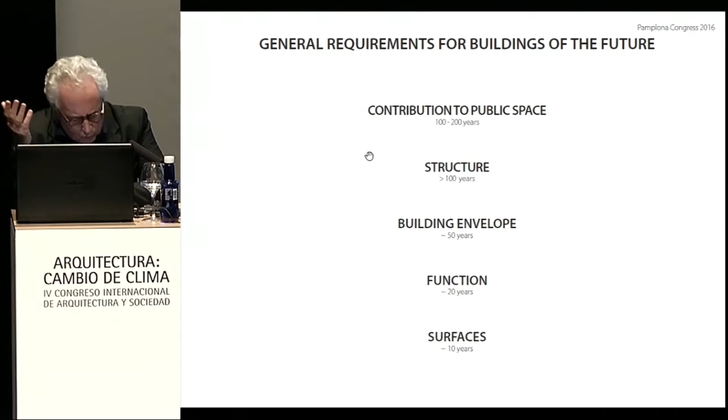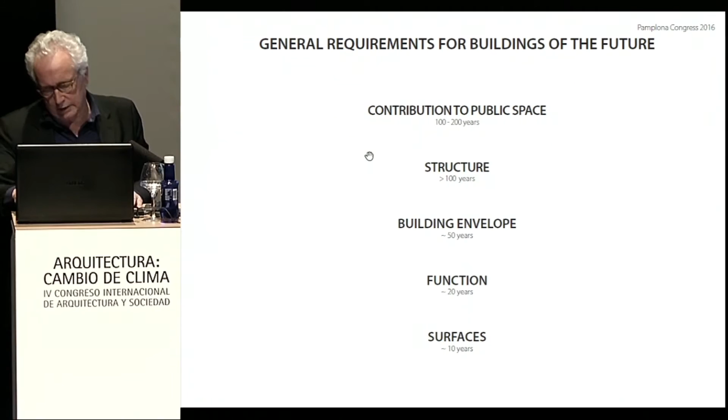You all remember this very nice book by Giedion about time, space, and architecture. We were talking a lot about space during the last 50 years in architecture, but we did not really talk too much about time. But when we deal with this question of time, we have to understand that a building nowadays is an overlapping of 5 very different technical systems. And these technical systems, in a long-term view, have very different lifespans. That's a little bit a contribution to this resource efficiency, which I will explain afterwards.

So the first question - which will last longest, which is the most important decision about architecture in the 21st century - is very simple: it's the question of the contribution to the public. So the key question for architecture in the 20th century was a little bit, how good does the building work? How good is the use of the building? How good is the function of the building? At the end of the 20th century we learned to understand that the feeling in the building is very good.

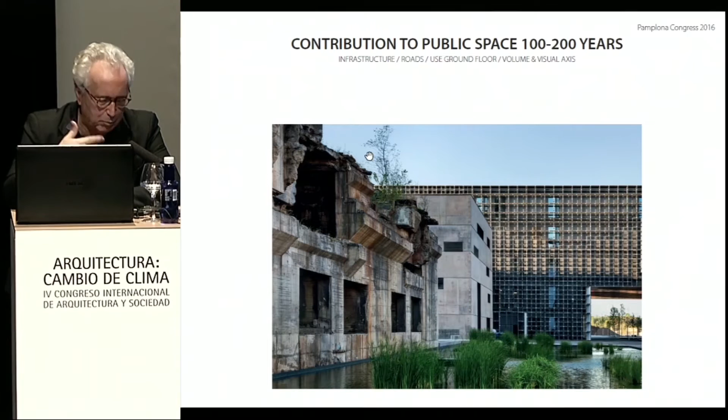But in the future we will have to learn what is the contribution of the building to the public. So I always say it like this: the most important user in the 20th century was the person who moved into the building. But the most important user of the building in the 21st century will only be the person who passes by. Because in the feeling, in the emotion, and in the values of that person who passes by, there is the future of the building. Because we don't need a first user, we need a second user, we need a third user, and this is a question of the value of the building, how it is accepted in practice.

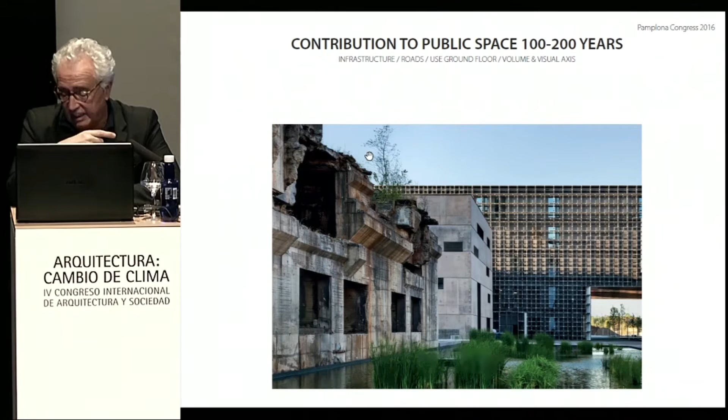Now I tell you something about Switzerland. You know, Switzerland is the only country in the world whose constitution states that sustainable development is a goal. But when Swiss people speak about sustainability, it's something very easy: how can we keep up the values of our society in economic, ecological, and social terms? So everything is related to a question of the time frame.

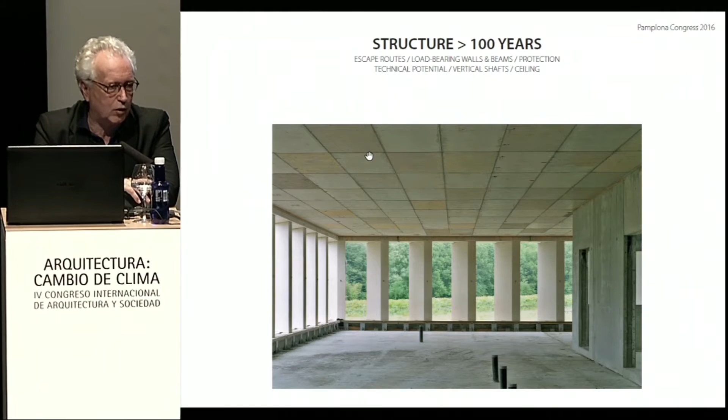And therefore there is a law in Switzerland: when you design the structure of a building as an engineer, you have to guarantee it for 100 years. And if there is damage in the building before that, the structure - understood as the load-bearing quality of the building and its vertical organization - is at fault. And if there is a mistake, don't be the son of a Swiss engineer. It's dangerous.

Don't be the son of a Swiss engineer, you know. But it's by law for more than 100 years, and I think it's very reasonable. When you understand that this part of the building should last for more than 100 years, you can imagine that they think the value of the building should generate benefits to society in a much longer term. And that's the relation of the 200 to 100.

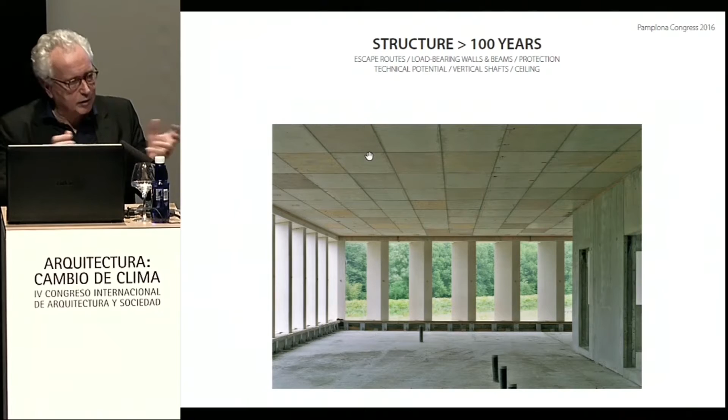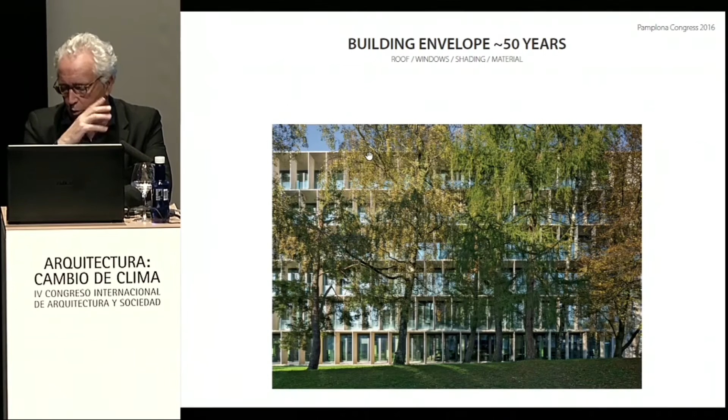The next one is also very simple. When we do research, we always find out that one of the most expensive parts of the building is the envelope, according to economic terms. And the envelope becomes more and more expensive in a building, even in future. So the average lifetime at the moment in the existing building stock is about 50 years. Then the function, the program, the use of the building is only on average 20 years. And the more specific the function is, the shorter the lifetime.

Maybe you know all hospitals. Hospitals are buildings where the building cost is the running cost, because you change these buildings and you have to adapt them anyway. So be very careful when you do very high specific buildings.

And the next one is the surface, you know, the surface including all the technologies, all the heating, cooling, ventilation systems. At this moment, everybody tells me we save the world and we save the climate by doing investments which have a lifetime of 10 years. I'm sorry, the 10 years I didn't invent, that's how these industries are living on, you know.

So I don't believe that we really can adapt to climate change or tackle greenhouse emissions by using a lot of technology, heating, cooling, mechanical ventilation, and these systems, which on average have a lifetime of less than 10 years. Very strange, I don't know why we believe this. I'm sorry, I don't believe this.

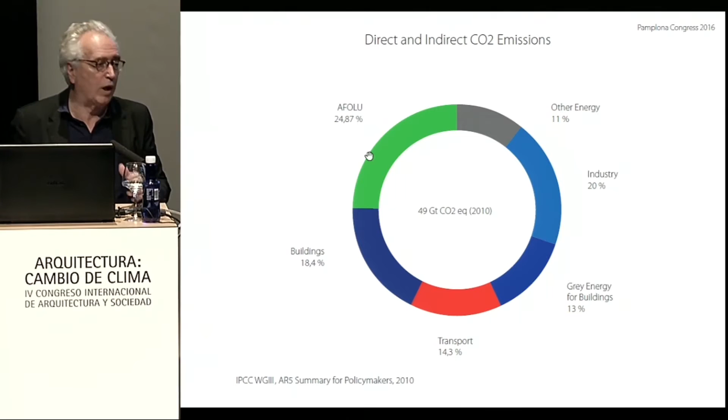Agriculture is 24.87%. Industry overall is 20%, and 13% is about what we call in future the gray energy. The gray energy is all the energy used to produce all the materials we need in the buildings. Otherwise, you see the transport at the moment is very low, only 14.3.

So electrical cars are nice, but they will not change the greenhouse gas emissions. I'm really sorry, it's very low. But when you calculate together, 18.4 plus 13, that's the global number, about 32% at the moment is only related to the questions of doing and maintaining buildings.

This number is a global number. It's a summary from the Intergovernmental Panel on Climate Change, which is a United Nations organization. These are the numbers from 2010. They adapt them every 2 years when they have their conferences. It's not that different, so I still have it there.

So architecture is the biggest contribution to greenhouse pollution overall. I'm really sorry. And how different this can be in different countries - I give you a number for Hong Kong. 91% of all the greenhouse pollution of Hong Kong is only related to buildings and maintaining buildings.

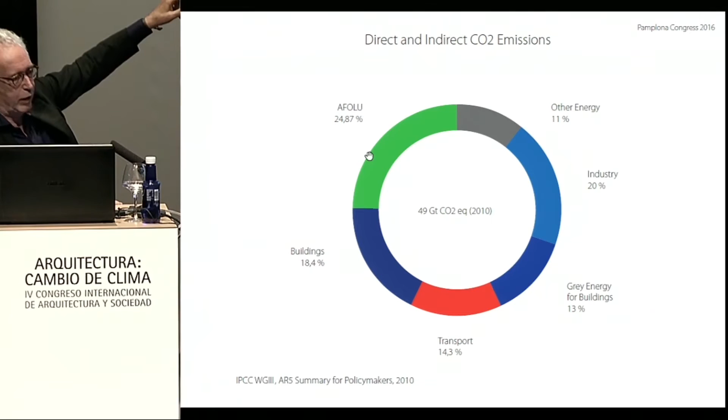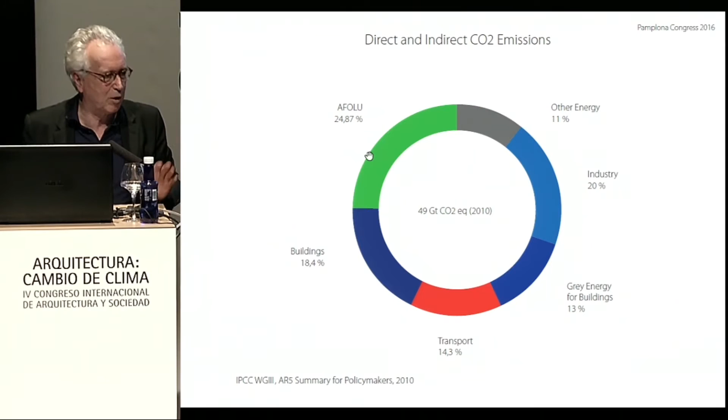So I know you were talking yesterday about the cows, the green things up there. It's also nice, but when this would happen in Switzerland, I would say it's a Swiss behavior, because normally when in Switzerland you tell somebody you failed, he always tells you, yes, but the other one also failed. But this is a funny story, I don't like it that much. It doesn't mean anything, so I'm sorry about this.

We have this phenomenon at the moment all over the world, that incomes and real estate costs develop very differently. When this goes on, you will see a lot of social tensions, social questions, and social fighting. It's funny that this is a parallel development which I can see in nearly every country.

So when we were talking about these issues, I'm mainly talking about two questions. The first is how to make buildings more efficient in maintenance and investment cost for the user. The second is how to increase comfort, or at least keep the same level of comfort, while reducing impact on greenhouse gases and carbon dioxide.

We've been working on this for more or less, look, when I was young, the first political thing I remember was the oil shock of 1973. I was a student then, and the highways were empty. I thought, this cannot be the future of our societies, depending on these things.

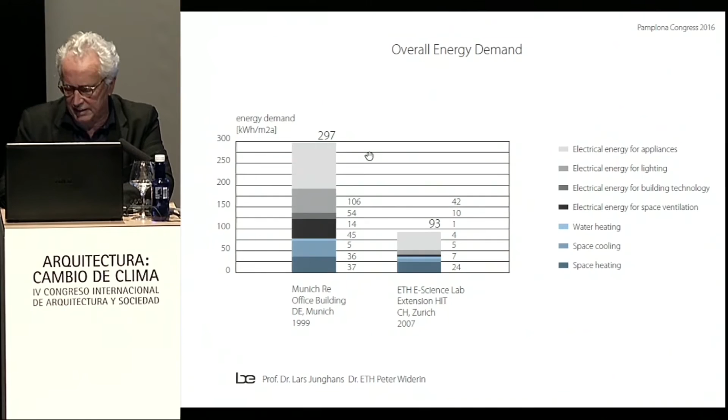Now I will show you only three buildings. This is ETH, a university building at a campus in Zurich, used by many different departments. It's the best performing building in social acceptance and energy performance of the whole campus.

For us it is always very difficult when we speak about energy as abstract numbers. In the end, it's a question of comfort, acceptance, social and cultural acceptance, and performance. So let's have a look at this building.

One very simple idea about this building is that there should be no sun on any piece of glass from the 28th of April until the end of October. So all the geometry of the facade outside is only a geometry of shading.

There is a very small advantage of these shading systems. It's funny, but researchers working in this building, a lot of them are still smokers, and normally smokers have to leave the building to smoke. But smoking is part of their routine, so I made a building where even the smallest room has direct access to a balcony. Because all the glass windows are sliding doors, every researcher can go out to his balcony to have a cigarette.

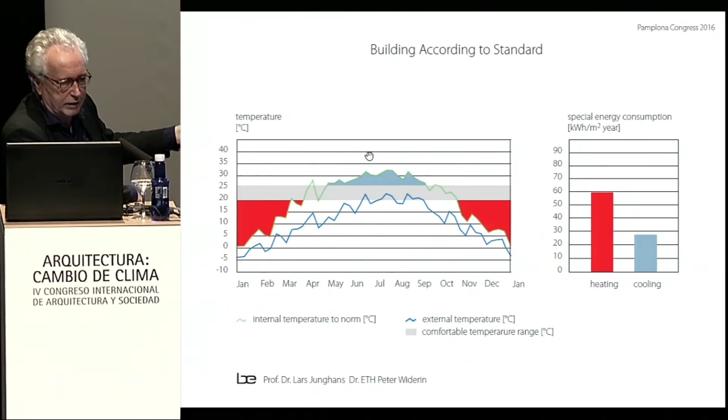And then, when you're an engineer, this is a very nice diagram, because on the red areas you know you have to heat, that's the capacity of heating. On the blue level, that's to cool, that's the capacity of cooling.

But I'm never interested in the red and the blue. I'm always interested in these very short periods you see here, where you don't have to do anything and everything is fine.

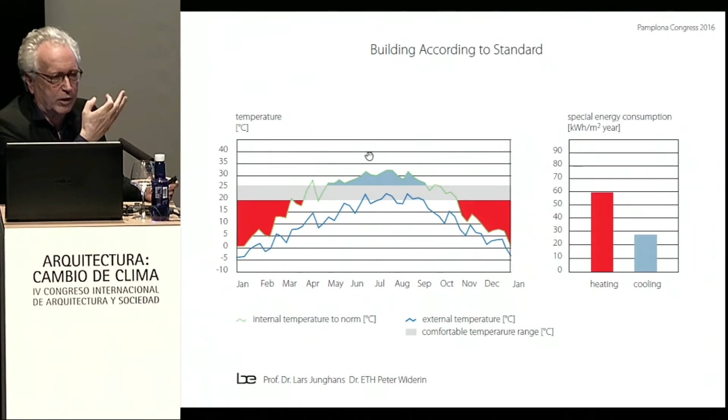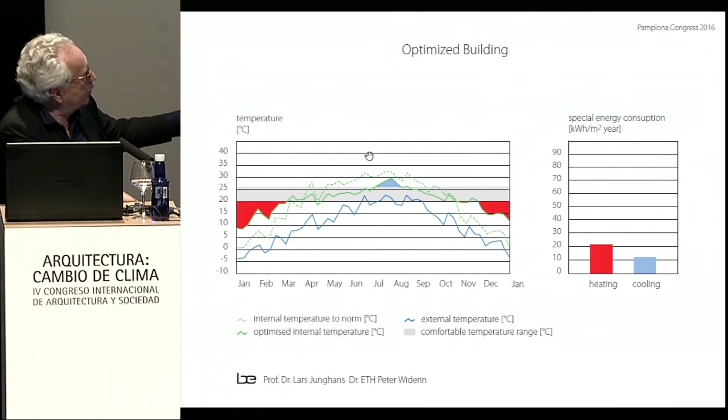So what we developed during the last 20, 30 years is a strategy which we called optimizing the building. And when you optimize the building, you get results like this: the period where you don't have to do anything becomes much longer, and as a natural result, the overall amount of heating and cooling reduces very much.

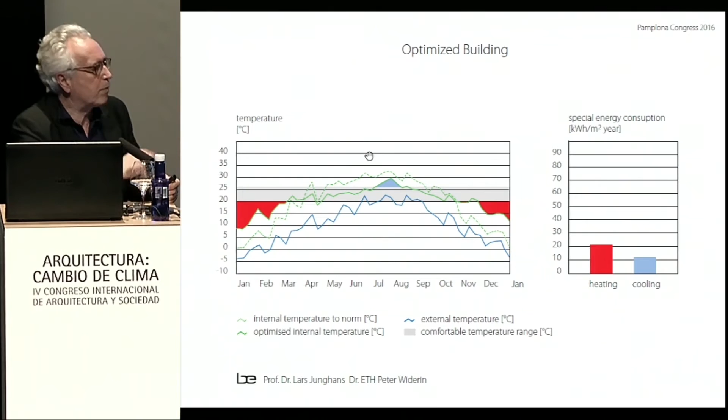So in the end you will ask me, how do you do this? But in the end, this optimization is only about architectural, geometrical questions.

In every situation in the world, according to the local climate — and I pronounce the word local because every city is quite different according to temperature — therefore you need a lot of data. You can optimize a building in relation to architectural questions.

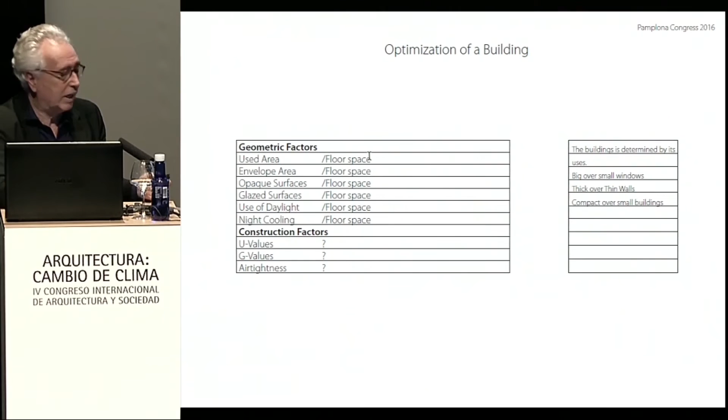And the result out of these questions: you can now find which is the most reasonable building for the exact situation in which you build.

And now I show you very shortly the 22, 26. This is a very small building. It's 3,000 square meters, about 500 square meters every floor.

And you see there are thick walls, but they have nothing to do with the heat capacity of the building. It's only something I like a lot. I like thick walls much better than thin walls, so I normally like to make thick walls. This is more about structural problems than U-value heat.

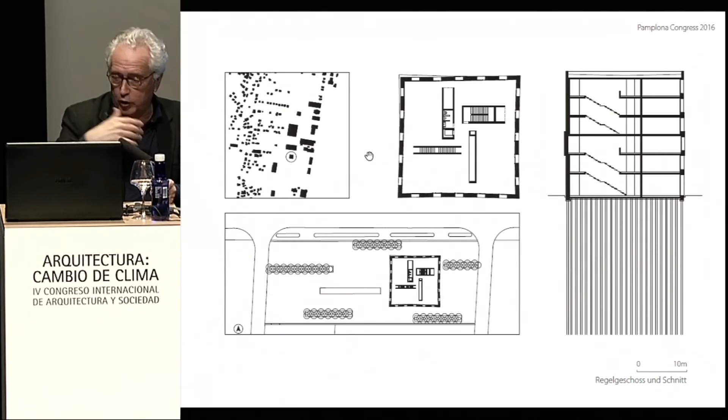And the only thing is, I'm not interested in the program in the building, because all the different rooms will be occupied in a very different way, and history will show.

I will lead you now very shortly, in theoretical terms, through what we did in the building. Look, now when we develop a building nowadays, I'm always interested in some very simple question: how will the building behave in temperature developments without anybody ever going into the building?

I want to know the green line. You see the green line? The blue line is the outside temperature of Zurich. And you see the green line — what is the materialistic condition of the building, and how will the building perform in relation to the outside temperature?

Over one year. That's a question which is very difficult to answer in physical terms, but that's the main issue I'm interested in.

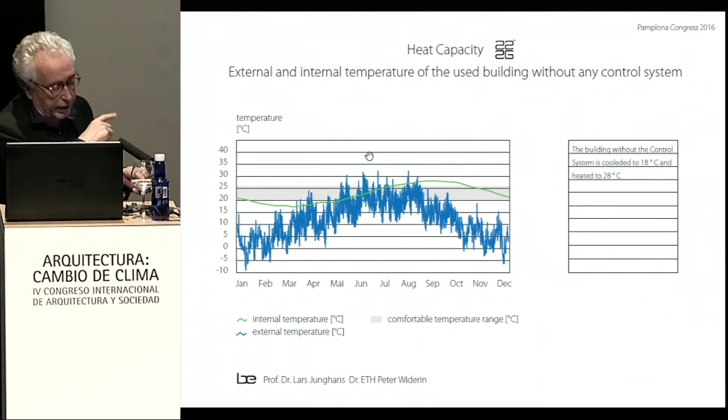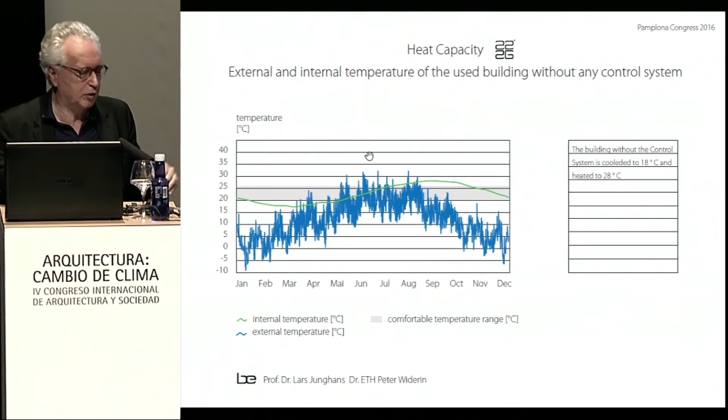The second thing is, now when you see the green line again, through the use of the building, the temperature level will rise as a starting point. And now at the third step, what we do with software — why we determine the behavior of the building by software — that's this area where you will reach 22, 26.

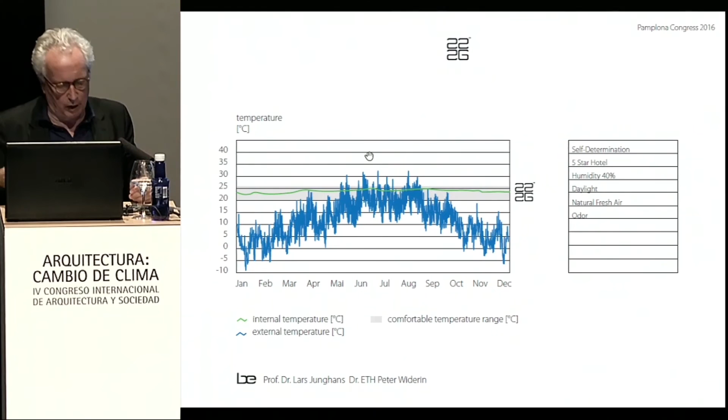So it's 3 steps. First, the materialistic question of the quality of the building. Second, which are the scenarios of using the building? And third, what can the software do in relation to the building to adapt, to optimize this kind of temperature?

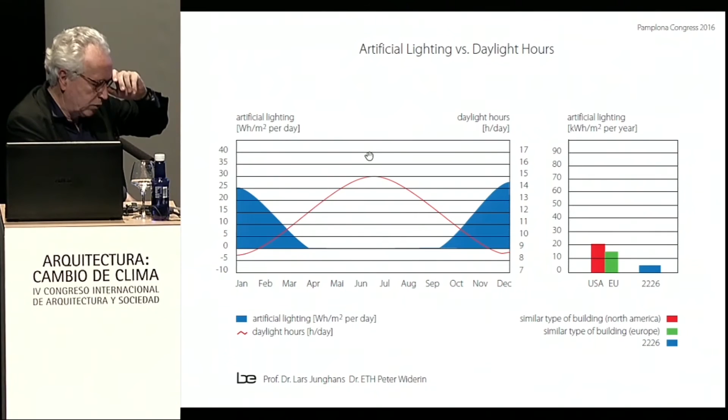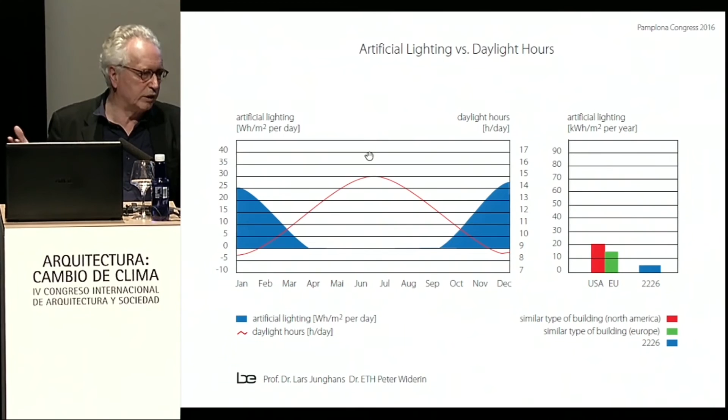Now, there is another issue which is also very important. The red line is the potential of use of sunlight in the building. The blue lines are the areas where you need artificial lighting. So it's very important that you design a building which does not need artificial lighting all through the year, only according to winter time or summertime or things like this.

This is the building now. It's 6 stories high. When you calculate very properly a modern building using a good glass, using quite reasonable materials, making reasonable percentages of openings and things like this, you will find out that only 20% of the energy demand of the building is related to the outside temperature.

But 80% of the energy demand is related to the people, to the use of the building. But when you go into a building, what kind of impact do you have on the building?

First of all, you bring a lot of temperature with you. I don't know if you know, but you are quite bad heaters, but everybody of you brings with him about 80 watt per hour. Maybe there are some bigger people here, okay doesn't matter, they bring in about 110. It's a very physical, very simple idea, surface, temperature, very simple. So you bring in a lot of temperature.

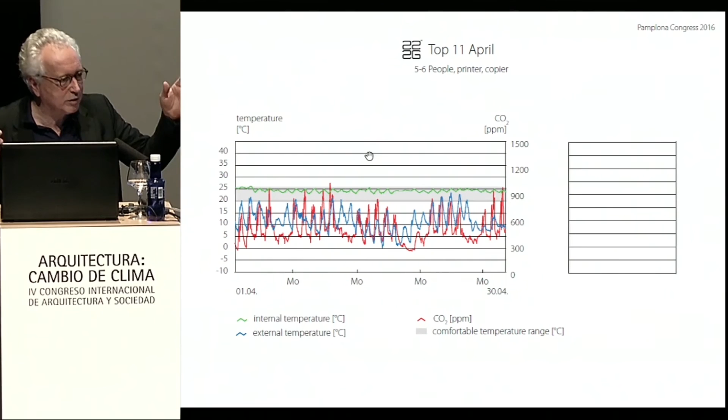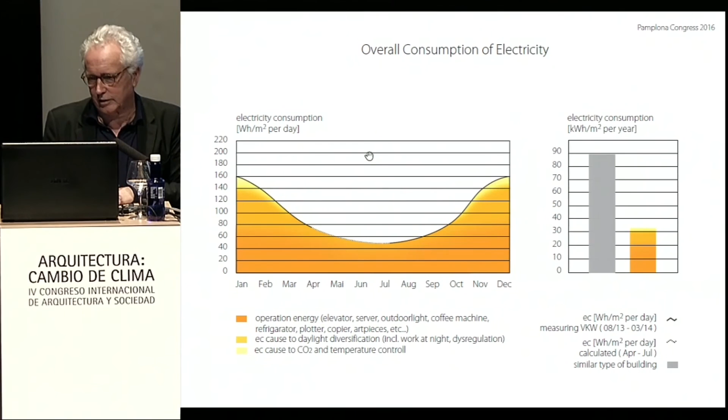Now I'll show you different rooms. The red line is always the carbon dioxide, the blue line is the outside temperature, the green line is the inside temperature. You can imagine that out of this, when you don't have to move anything anymore, the maintenance costs shrink rapidly. But I don't want to talk about this.

And after 3 years, they also believe that they don't need any additional things. Okay.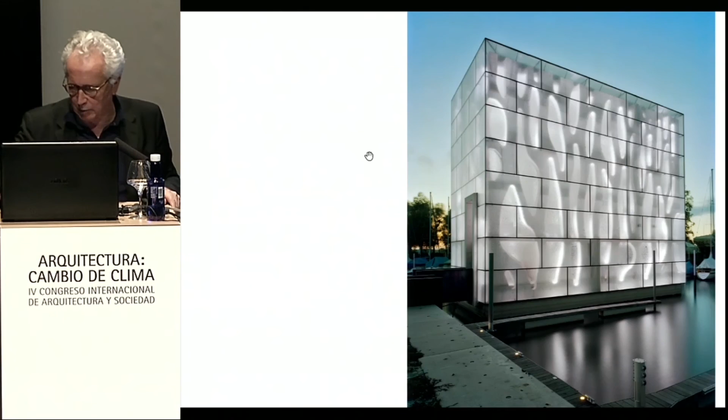And why did I dare to do this? Because the client of this building is a woman who owns a small harbor at the Lake of Constance, the Bodensee. At the end of the year, she always comes up to me and says, 'Oh, I earned a little bit of money, can we build something?' So every year we do a small project together. I asked her why, and she said, 'Because I learned that good architecture can increase the quality of my life.' Thank you very much.